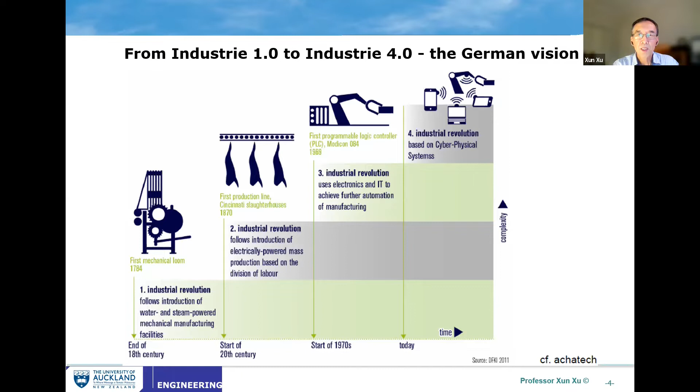So cyber physical system is the key concept in Industry 4.0. But what is it? Cyber physical system, as it implies, has got cyber plus physical, forming one system with physical elements and cyber elements. When you have both, that means the virtual digital world and the real physical world. Once you combine and marry these two different worlds, you become a far more complicated and sophisticated but capable system - that gives you CPS.

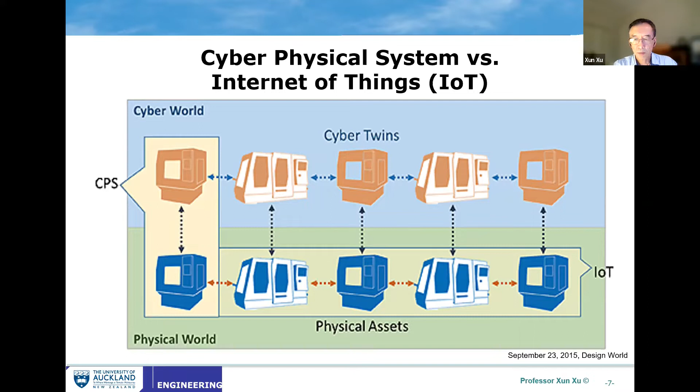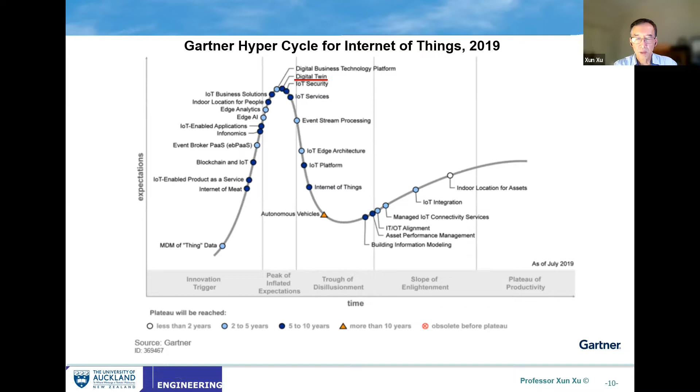And some will actually take less time. So if you see some of the light blue dots, it's telling us it will take about 2 to 5 years to travel through the entire cycle. So it's a useful kind of technology prediction to have a look in terms of knowing more about the technologies, where it is going.

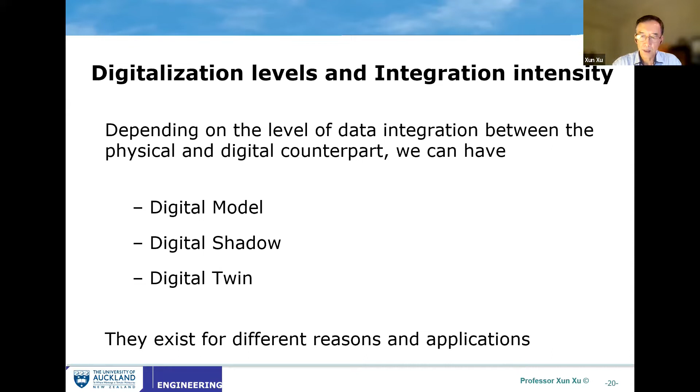So in terms of digital model, that's been around for ages, and those who remember computer-aided design tools and systems like Pro Engineer, CATIA, NX, SolidWorks - well, they're there to create digital models. That's been around for ages.

So they create a digital model for perhaps a piece of machinery, or perhaps for a product you want to make. So that means you have the physical object, and then you create a digital object. In many cases it's just a CAD model, so it has got geometrical information. Sometimes it has got material properties, and other times it has got assembly constraints, tolerance requirements and surface finish requirements. That's all fine, and we've got that.

But there's actually no data flow automatically from the digital object to the physical object. Well, clearly, if you design something and haven't made that physical object, you wouldn't have that link. Now, if you want to create a link, very often you have to do that manually. So that's digital model - we still use it, it's still useful, but it's not quite digital twin because it does not have a kind of data communication between the physical part and the digital part.

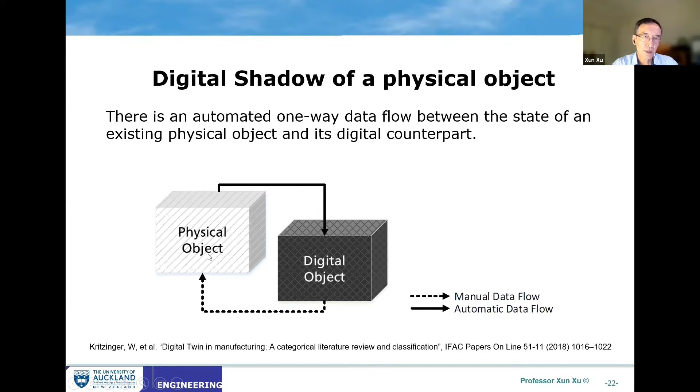So this is actually quite useful technology. I'm going to demonstrate one example that's been developed in our laboratory, maybe two of them. So that's shadow - well, still leaving the communication between digital to the physical part manual.

Then, of course, we have digital twin. This is really looking at data flow in both ways automatically. It's very important to have the data flow from digital to the physical object, so that you can actually make decisions and optimize your physical system or product, because you're making decisions in your digital twin parts. So this is perhaps the ultimate paradigm for digital twin technologies. And clearly it's not easy to do this.

So a logical sequence will be developing a digital model, then a digital shadow, and then the digital twin. That will be a natural sequence. But I should still emphasize that all three types of digitalization methods all have their use and benefits in different applications. So that's the three levels of communication, or different levels of integration intensity, and this digital twin has got the highest integration intensity.

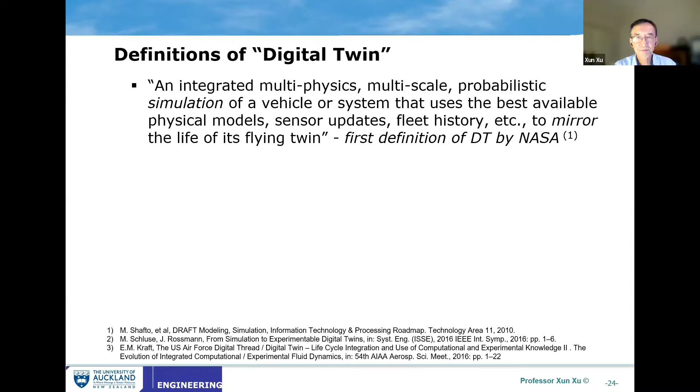The second definition is from an IEEE conference. This really emphasizes the ability between the physical parts and the virtual parts, the communication capabilities. So this is the first time we talk about communication between the two counterparts, the physical and the digital counterparts.

This definition number 3, I think, is perhaps a more complete one. It talks about using multi-physics and multi-scale, probabilistic simulation models, but it also talks about a digital thread. The digital thread is the set of data that you define that will be communicated between the physical and software entity. That's very important.

The other aspect is that the digital twin has got predictive capabilities, so it has decision-making capabilities, and that's why it can predict what's going to happen on the hardware parts. The third aspect is it talks about over the life of its corresponding physical twin, meaning your digital twin is going to be a living object throughout the entire life cycle of whatever that physical entity is. So that means the digital twin will have to get updated from time to time so that it reflects whatever the physical counterpart is or the status it's at.

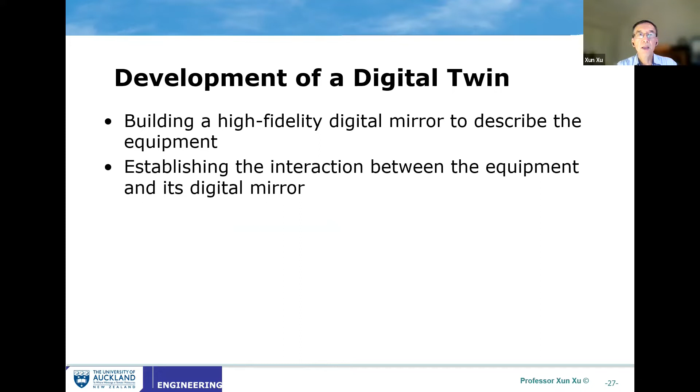Well, it's actually not difficult to understand. First of all, you need to develop a digital mirror to reflect your equipment or products. Then you need to establish the communications between the two. And the third thing is really you need to work on the data, both coming from the physical entity and the virtual space or digital twin, and then make decisions for the entire system. So roughly those are the three phases of developing a digital twin.

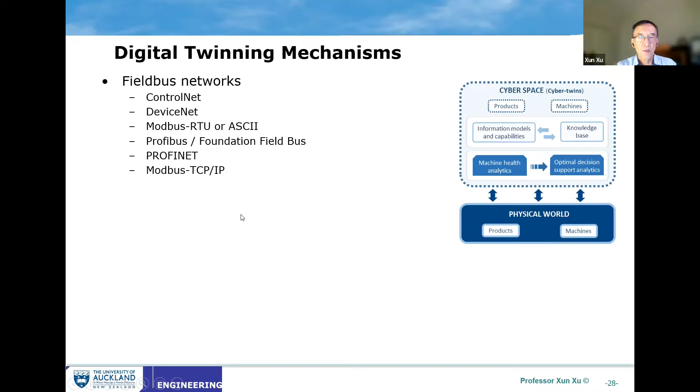We talk about communications and how the physical parts communicate with the virtual parts. There are actually many different mechanisms. The paper we just got an award for talks about some of these twinning mechanisms in detail, but I won't go into the more technical side. Typically you'll rely on some field bus network, Ethernet-based industrial communications, or industrial wireless communications and networks. Typical ones we often see are MQTT, OPC UA, and MTConnect. There are different mechanisms out there, and different applications tend to use different protocols.

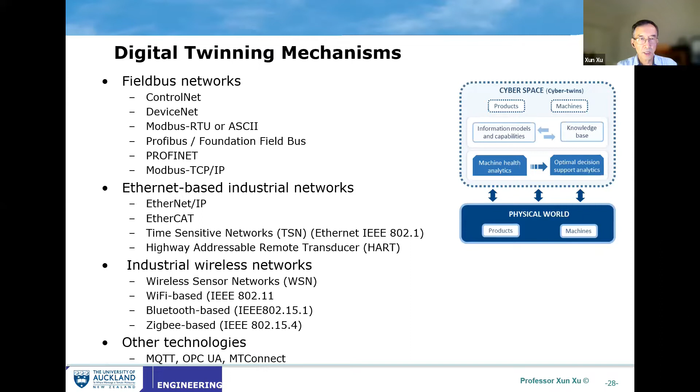So that's digital twin - how do we define that, the applications, and the twinning mechanism. I think the next topic I want to quickly cover is the international standard I mentioned at the beginning. So there is an international standard. But before we look at that, these digital twin standards are mostly ISO standards, covering the spectrum from design all the way to manufacturing and inspection.

It talks about elements of observable manufacturing elements - these are the physical elements, machines or robots - and then the digital elements. To make distinctions between these two, clearly the digital elements are the digital twins. Observable manufacturing elements could be people, equipment, materials, and facilities. Digital entities could be the product itself - there will be a digital representation of the products - and could be the process as well, and the applications that we may see.

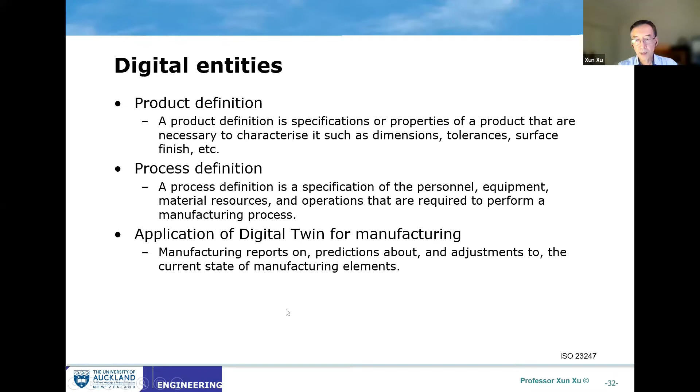Now, as the standards were developed, there was a lot of industry case studies done to support the development of the standards. One of them is the work with Boeing when they produce their wing structures. They often need on-fly technologies, in-situ capabilities of measuring and machining, or what they call robot drill and fill. By developing a digital twin, they can facilitate that process and really cut down the time for the wing structure manufacturer.

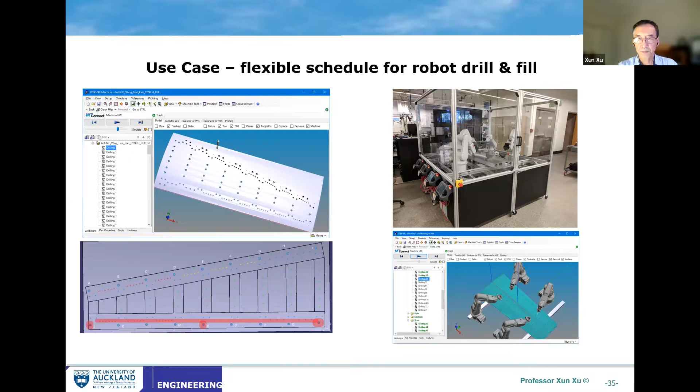Okay, I think I'm coming to the end, but before I finish, I just want to give you some examples that we've done in the laboratory that I'm from. I'll give you a quick look at a bicycle we developed the digital twin for, then we developed a digital twin for machine tools, and also we've managed to retrofit a legacy robot for digital twin technologies.

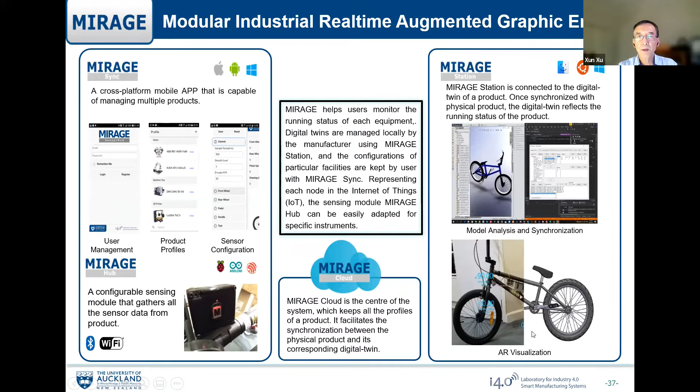Okay, so first up is the bicycle. I won't talk about the entire poster here, but I just want to talk about the way that we developed the digital twin for the bicycle. Basically, we've got a real bicycle and a twin digital model of that, and they actually combine together. So I just want to show the digital model itself.

Sorry, can I ask you whether you can see this? Dr. Samir? Yes, we can, yes.

Okay, good. Now this is a SolidWorks model of a bicycle. You can have a model, but you need to reconfigure that to define different connections and joints - that will be step one. So if you like, we start from a digital model, and then we move on from digital model to a digital shadow. Here is how we define different connections of different parts. I'll speed up a little bit - you can see different parts are being highlighted, and then you define different connections. The reason we want to define different connections is that we're going to have sensors on the real bicycle that will produce data linked to different parts of the bicycle.

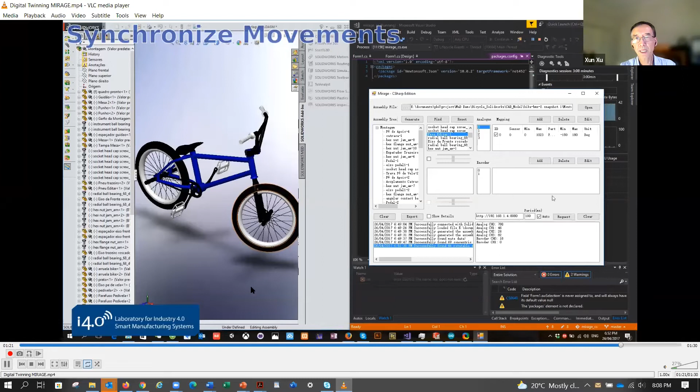Okay, you can see the wheels spinning there. That's because the data is driving the wheel spinning. So in the end, we want to see the bicycle being driven. The digital model is driven by the physical data coming from the physical model. So this is the student's work, he has done the work.

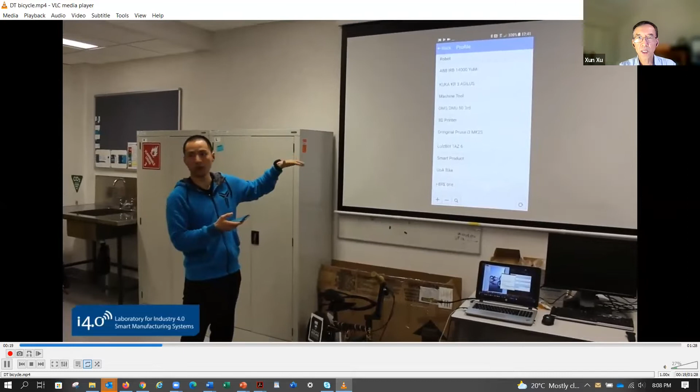You can see the bicycle here. We've got sensors around that. It's communicating with our digital twin using Bluetooth. Now I'll just speed up a little bit.

So you can see the sensors there on the bicycle, and you can actually use your mobile phone to check the data coming from the sensor. You can see the data there. That's from the sensors on the bicycle, and that data actually goes into the digital model. Then it becomes a digital shadow.

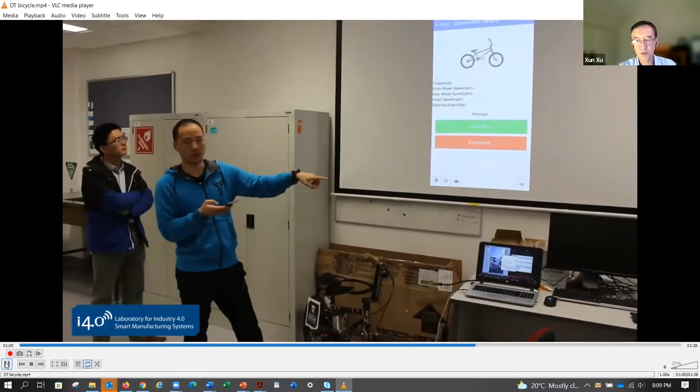Because you have digital data already, you can easily use augmented reality. You can see where he's pointing his phone to the bicycle, and then the data can be overlaid on different parts of the bicycle, in real time demonstrating the data that's coming from the sensors. If somebody's riding the bicycle, you will see the data changing, of course. So that's some advantage we can have with this digital twin model.

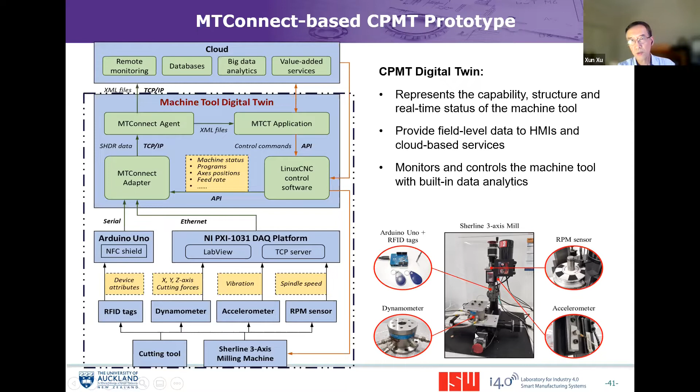Now let's quickly go through the second example, which is the machine tool. The machine tool itself has got a lot of moving parts and different components, so we developed a digital twin for it. We had sensors fitted onto a little desktop machine tool just to do a prototyping exercise, and then we can get the data from the machine tools into the digital twin. You can see the data is about different axes, speed and feed rates, and the position data as well.

And you can overlay the digital data using augmented reality. Once again, to support your production process, you can basically see the things you wouldn't see without the digital data there. You can see the toolpath is being overlaid here.

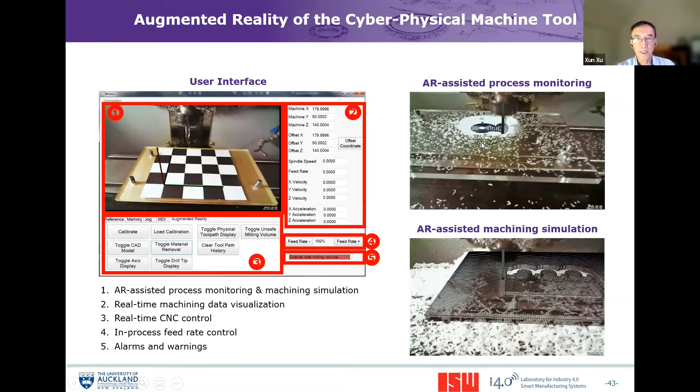The last example is retrofitting a legacy system, which is a KUKA robot. I think this is about 20 or 25 years old. It's a robot that's been around in the lab for ages. But what we've done is we've put in a Wi-Fi enabled chip, which is ESP32, which has got Wi-Fi capability in the controller through serial communication.

Then we use MQTT protocol to communicate through the cloud, so you can actually get the data from the actual robots. I've just got, again, a video here, if I can just show that, which is the final one. See, this is the visualization that we got from the clouds. That robot has communicated to the cloud, provided its moving data there.

You can have multiple clients there, of course, accessing that server. You can see here's another one, and that's the real robot that's moving. And of course, it spits out its motion data as well. So that data is now going through the cloud and driving the digital model. This, if you like, is a digital shadow, a shadow of the real robot. You can see different axis data here changing all the time, on this 6-axis robot.

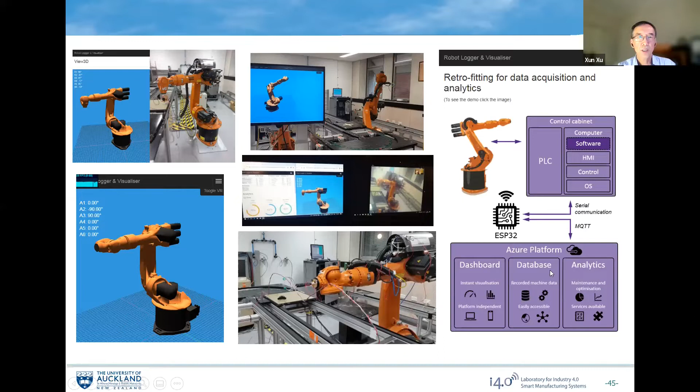So that's an example. We could actually go from the digital model to the physical robot as well. I won't go into details of this, but this is a test that we could also go the other way around.

Right, okay, so let me finish by saying a few final words. First of all, I think one of the key concepts in Industry 4 is the cyber-physical system, and the key in cyber-physical system is digital twin technologies. It's still a hot topic around, if you search around. We acknowledge different views on digital twin, and that's why we talk about digital model, digital shadow, and digital twin.

I touched upon the ISO standard, which is just hot off the press. If you're really keen to do research in this area and want to see what international standards are providing, that's probably where to go. And now we finish off with 3 digital twin examples that we developed in our laboratory.

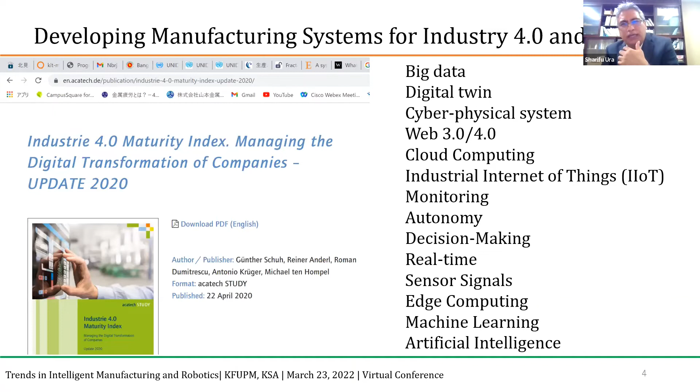Previously all the products were made by craftsmen, and craftsmen can handle many varieties of product with small volume. Then we went for mass production. After mass production, we came to mass customization. And then after mass customization, we came to regionalization, or personalized production.

Regionalization is a very important issue. For example, this year, if you see the US market, Toyota is the number one car seller. Their cars are sold because, during this pandemic, Toyota could manage their production, since 80 to 90% of their parts they are making inside the US. So their supply chain is actually a regionalized supply chain for the North American market.

So regionalized production is actually one of the key issues that will come. And personalized production also, one-of-a-kind product—this kind of thing will be very important from now on.

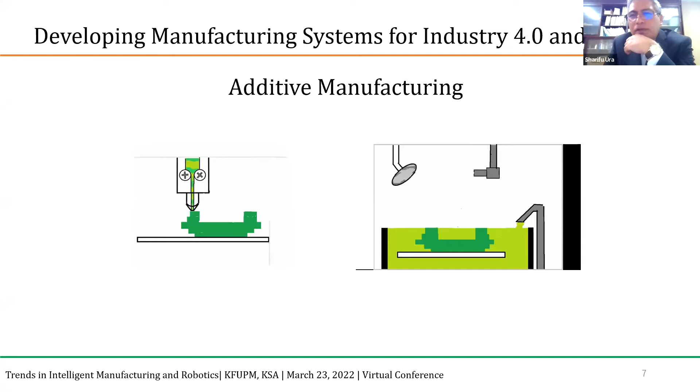The other important aspect is the socialization of manufacturing. Previously, manufacturing would be done by very highly skilled persons and so on. So this is going to change.

You will see all over the world there will be a lot of fabrication labs where you walk in and give an idea of your product. Suddenly it will be digitized and produced. So this kind of socialization will come into being, and 3D printers and this additive manufacturing technology are going to be a very important driver on that.

For example, in our city, besides Starbucks there is a fabrication lab. A lot of 3D printers—high school, middle school kids go there and make whatever they like. So this socialization aspect is very important for this new technology.

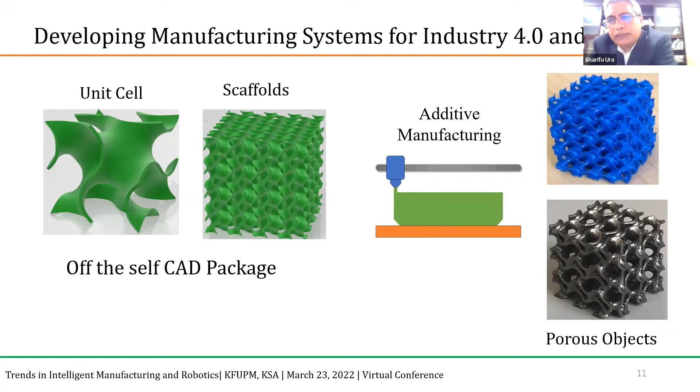So we are trying to build a capacity on that. We have actually created a lot of porous structures for many applications, for veterinary doctors, for soilless cultivation, and for tool shanks with nice vibration control, and so on.

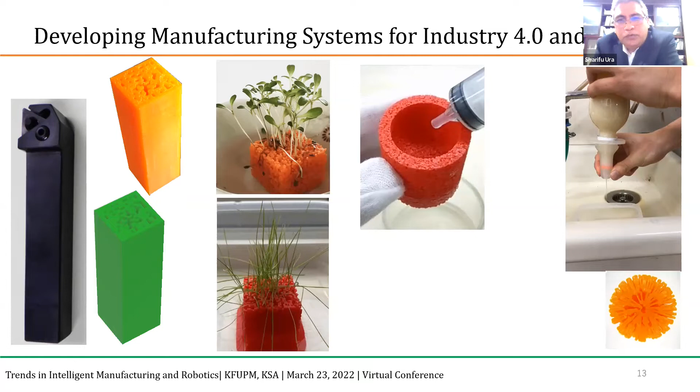This kind of structure is actually very difficult to make using off-the-shelf software. We are developing some systems by which we can do it by ourselves. Say we would like to make a porous structure.

Can you see the video, please? Can you confirm, is the video running? Yes, we can see. Okay.

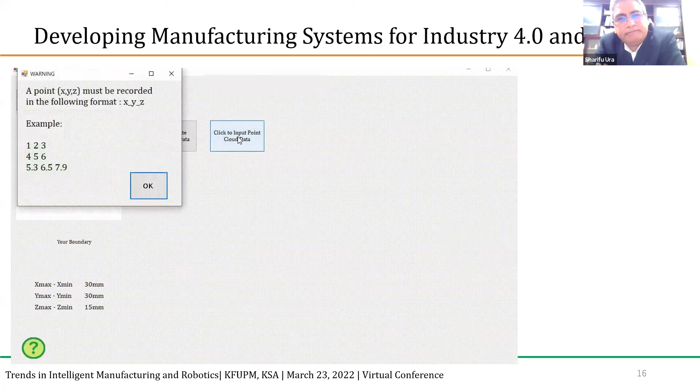This one, we developed another system, actually, for soilless agriculture. We have a non-porous structure. We just create some point cloud, random point cloud around that structure, as you can see, and then we fill the random spaces using a polyhedron and tetrahedron. And finally, we get the structure we want, and we have this STL data by which we can run our 3D printer.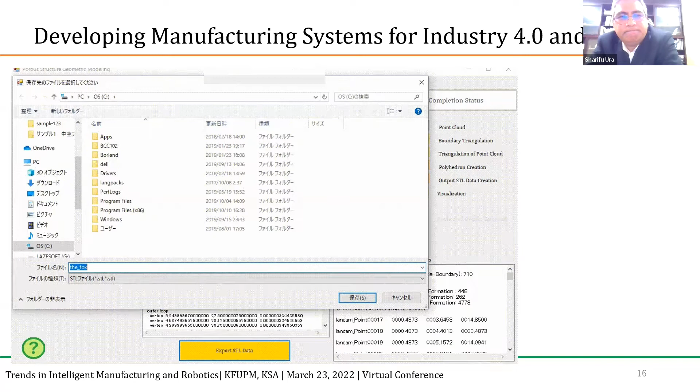Very simple, the user doesn't have to do anything, just 2 or 3 clicks. And this is a software also we developed by ourselves. We can analyze the cross section of a porous structure, whether or not it could be made perfectly or not.

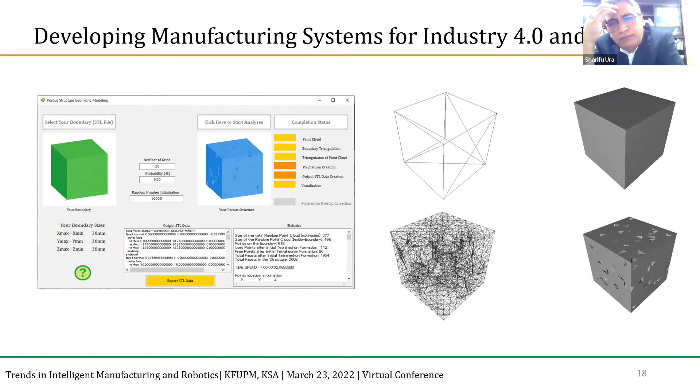So we also tried to develop some system by which we can ensure that, look, whatever my design may be, we could make it properly.

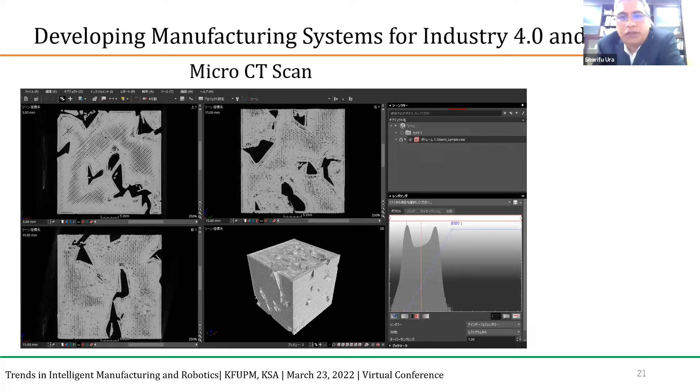So this is a study one of our students is doing now. He is trying to create a porous structure, and then he made the porous structure with different fabrication heights, so that he can take the real cross section of the product. And then we use micro CT scan to see the whole internal structure, whether or not it conforms with our design, and we try to see where the problem is.

So if we see there is a problem, then we go back to the design and try to fix it up. Usually for this kind of structure, we have problems with loose shells or thin walls, or sometimes fabrication errors.

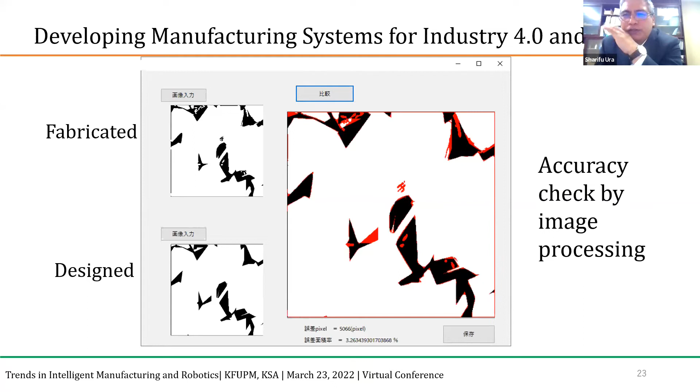As you know, the most advanced software is given by Materialise, a Belgian-based company. They always say, look, your porous structure is not printable, but unfortunately, or fortunately, this is not true. We always try to print it out, and we see that there is almost no problem with the fabrication. So we are trying to develop this kind of software by which we can compare online and give feedback to the designer so that he can stop or modify, and so on.

So now let me talk about Industry 4.0. Actually, 3D printing is also part of Industry 4.0, but let us give it the name Industry 4.0 at this moment.

Industry 3.0, the main point was... This course I have been teaching for our master's students for the last 5 years, and students from many other universities actually take this course online. So the first thing I have to tell them is, what is the difference between 3 and 4?

Industry 3.0 is actually basically automation, and you say that human is not good — human takes money, you have to pay salary, train him, and so on, so let us automate. But in Industry 4.0, actually, we don't say that human is bad. Human is also an important part, and we try to reinforce human by using all that technology, not discarding human from the loop. So that is actually the spirit of Industry 4.0.

And at the end of the day, what happens? We jump from closed system to open system. So there are many aspects of a closed system that we cannot use in an open system. Since the time is limited today, I will not talk about this — we actually cover it deeply in our course called Industry 4.0.

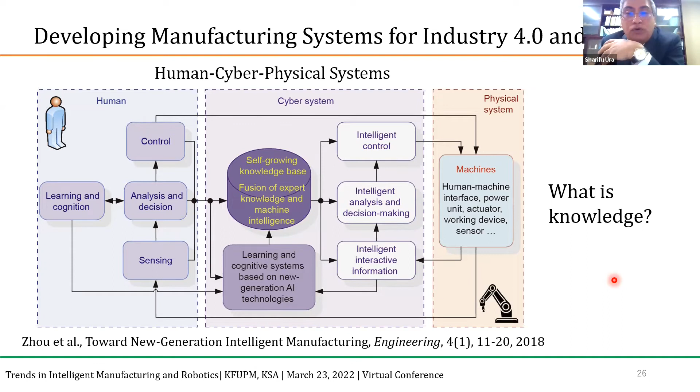So if I go back to the slides, they say that a self-growing knowledge base should be there, with some artificial intelligence for learning and so on. Now we know exactly what knowledge is. Now, when we build a system, we try to figure out everything based on this knowledge-aware network of our information. This is one narrative we always give to our students.

We say, look, for a human cyber physical system, we should have this enabler network connected by the internet, and we should have some sort of data acquisition system, or big data, whatever you call it, and there must be a self-growing knowledge base. And from where do we get this knowledge? Okay, we know the classification, but from where do we get it?

Our idea, in a very narrow sense, for example for machining or manufacturing process, is that there are three kinds of digital twins: object, process, and phenomena twins, that actually provide the knowledge. Therefore, we need to construct the twin and adapt the twin into the system. In that way, we will have this self-growing knowledge base. The more digital twins you can construct and inject, the more knowledge you will find. And there are four forms of knowledge.

What is a digital twin? Professor Xu has given a nice representation of that. I'll just add that if I would like to construct a twin, I have to construct five modules. One is the input module, the other is the output module, by which the twin should communicate dynamically in real time. There must be a modeling module by which we model our object, process, or phenomena. There must be a simulation module by which we actually reverse engineer that phenomena. And there must be a validation mechanism, to know whether or not everything is going fine, whether there is an error, and so on.

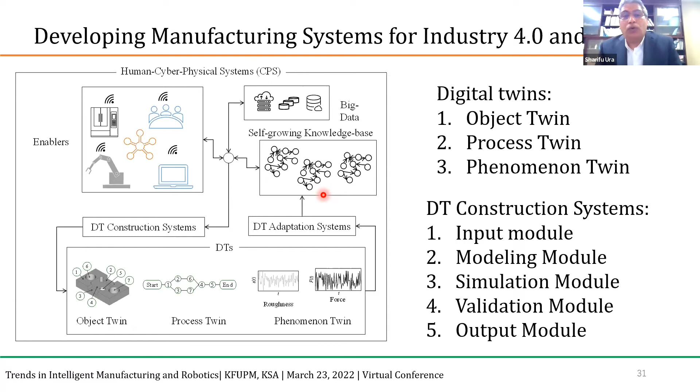When we use the twin, we try to see whether or not it has a real-time response. I think in the last presentation there was a question about how much time I should give. For this kind of phenomena, we see 0.2 or 0.3 milliseconds. If we wait more than that, we cannot handle it. So we actually got a very high response. Please go ahead, see, download, and expand on that. If you have any criticism, any question, or want to work with us, we are most welcome.

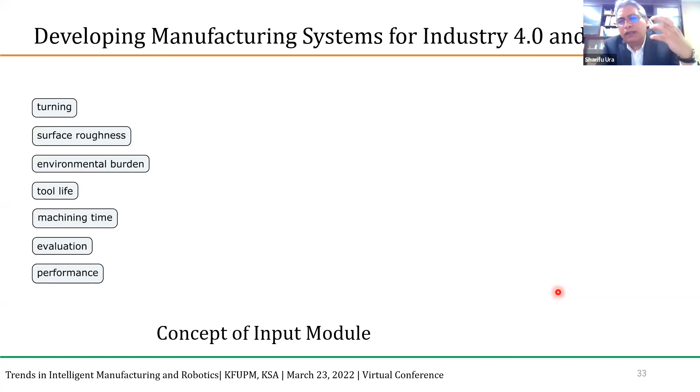I have no time to explain the whole bunch, so I will just talk about the input module, which is a very important issue for digital twin. We were trying to use almost a natural language type of expression to build this input module, because Professor Xu has shown that there are many ISO standards available. We would like to break those standards — we think that in Industry 4.0, each person will have his own way of talking or standards. So we don't mind whether he follows the ISO standard or has his own way of expression. We are trying to see how we can build this input module and organize all this information based on natural language.

For example, a very simple idea: turning, surface roughness, environmental burden, tool life, machining time, evaluation, performance — these are some concepts that came into my mind. If I organize them, it will create a sentence: performance of turning can be evaluated by machining time, surface roughness, tool life, and environmental burden. This way, at the shop floor level, people talk to each other and express their views. If we can put all this information into sentential expressions, it's very easy for humans to understand, and also for machines — we can easily make XML data out of that, which is machine readable. So we are trying to do what Professor Xu is saying, that we have to follow the standard. We are actually saying no, we will break it. This is a wild proposition, and I think industry, at least beyond Industry 5, will go to this level.

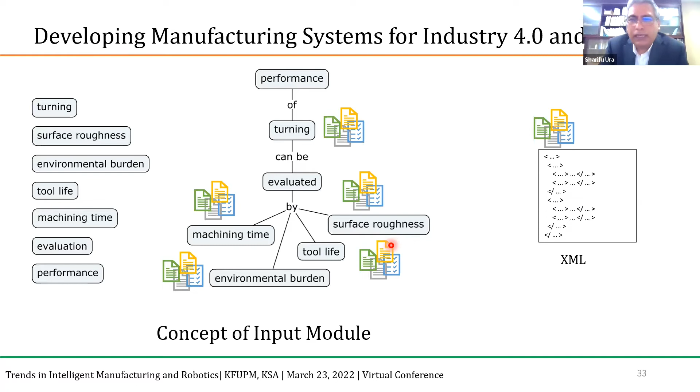So for the input module, we will have this XML data, and it should come from our big data. Where do we get the big data? Frankly speaking, there is no big data for manufacturing. The only big data we have now is material big data, developed by Professor Ashby at Cambridge University. Unfortunately, he sold his data to ANSYS, so now you cannot buy it from his company, Granta Design. For manufacturing processes, we don't have it — we need to build it up. So we are actually working on that: how can we organize unstructured or semi-structured documentation so we can build the big data, and the big data provides the XML data that can be fed into our digital twin's input module. This is work we've been doing for the last three years, and we are hopeful we will progress a lot. It would be nice if you can join us in that research.

So in the future, what is going to happen is that we will have some sort of iPad where we can see the digital twins, and we have our own needs - maintenance need, or decision-making need, or visualization need, or automation need, or our process planning or enterprise need. So for these needs, actually, we will get the knowledge from the digital twins.

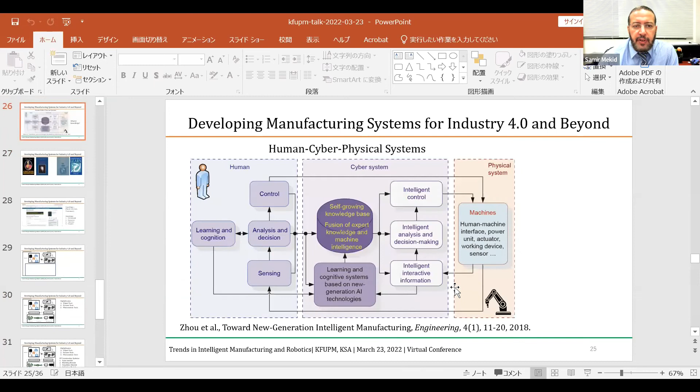Thank you very much, Professor Sharifu, for this nice and informative presentation. I've got one question for you related to Industry 4.0, related to 3D printing. Did you try to have access to the STL file and go ahead with modifications automatically, or here, yes, in this process here? Or what was the exact process you went through?

Yeah, for STL data, for example, this one - as you can see, we have only 12 facets. It's very coarse. So in our system, we actually divide these facets into very small facets. We have this capacity here, so we can manipulate whatever STL data we input into our system. We can manipulate based on the porosity level that we want, or the coarseness of the pores that we want.

Okay, so you are securing a closed loop efficient correction. Well, I should not say efficient correction. What I see is that it's very interesting - all the pores, they support each other. As you know, if you have a vacuum, you cannot add material. But the pores are so close to each other and distributed randomly that they actually support. Without support, we would weaken. So what I would say is that we are lucky in that sense - without doing anything, we could actually produce that one.

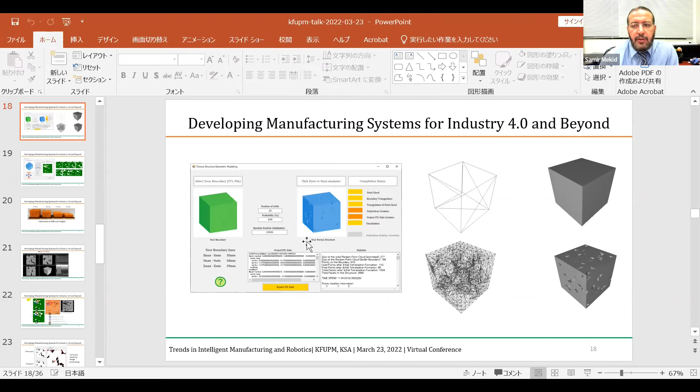In your slide number 35, when you were talking about a possibility - yes, here to have - there are various applications I'm aware of. For example, DMG or Index companies have already partial Industry 4.0 monitoring of processes and production lines. I don't know whether you have seen that, and what is missing in this loop?

Well, DMG Mori Seiki, you are talking about. Yes, these yes, German Japanese companies. Yeah, you know, Mr. Mori, I met him at Professor Teti's conference many years back. And we are talking, and what he's saying is that due to this Industry 4.0, all things are connected.

So his engineer is actually receiving a lot of information, and he has only 28 engineers to take care of all those machines in Europe. At the end of the day, human beings have to check. This is the problem that they are facing, and they are actually burdened with unnecessary information. So the thing that I told you is that now we are pretty much on...

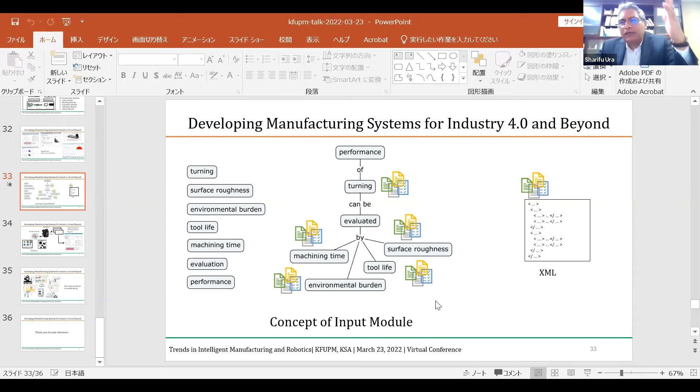For example, here we are saying that data will be used for building a digital twin. So if you think that data will be used for a digital twin, then think about the components of the digital twin and prepare information based on feeding those components. Otherwise your data will just grow up, and at the end of the day you cannot use it—it will not add any value to your production.

We've got another question asking what is new in Industry 5.0 as compared to 4.0. This is a question my students also ask me. You know, Industry 3.0 was only for M2M, machine-to-machine communication—we call it syntax. The grammatical rule is very, very important, that's why a lot of standards are there.

But for Industry 4.0, semantics and human involvement are very important—meaning is very important, what does it mean. And for Industry 5.0, or beyond 4.0, the most important thing will be pragmatics.

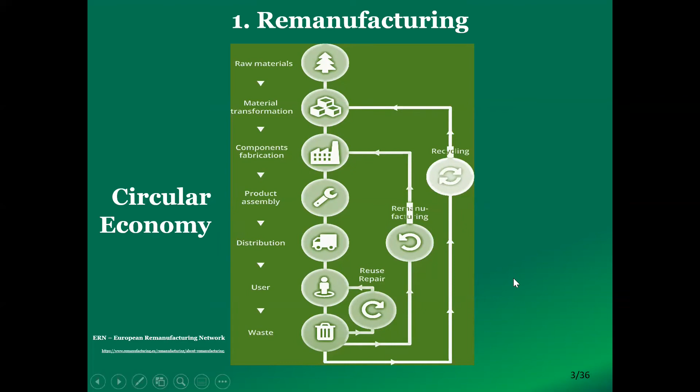As I said, it's part of the circular economy, and because of that, we are interested in what it does for us. But before I cover what it does for us, I just go through the different operations involved in remanufacturing.

Now, why can you have something better than the original product? Maybe at this stage, you could replace an old component with a new version of the component - let's say a component with a new material which is stronger, lighter, and therefore the final product can be even better than the original product. So at least the quality is the same or even better.

Disassembly is the first operation in remanufacturing. Without it, there won't be any remanufacturing possible. You have to take the product apart before you can do all these operations to it.

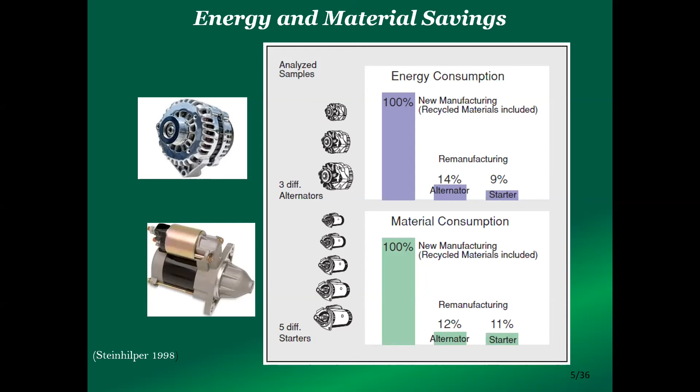So those are the incentives: environmental, resource, and other things you can save. And of course, all this translates into lower cost for the manufacturer and lower cost for the consumer. In many cases, a remanufactured product can be 30% cheaper than a brand new original product.

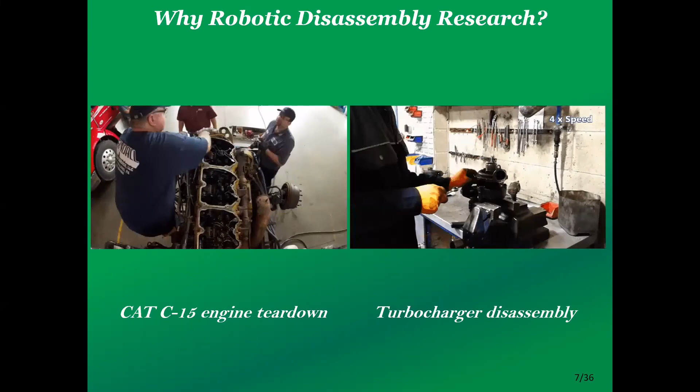The left-hand video shows disassembly, a real operation here at an engine remanufacturing company. Remanufacturing is very labor intensive, you can see lots of people involved. On the right-hand side, also remanufacturing, disassembly in particular is a very skill intensive operation. It's very hard to automate. So I show two things: it's labor intensive and skill intensive, and it's very hard to automate.

People try to use robots, but it is not easy, because it is a labor intensive and a skill intensive operation. So robotic disassembly is something people try to do to solve this bottleneck in remanufacturing.

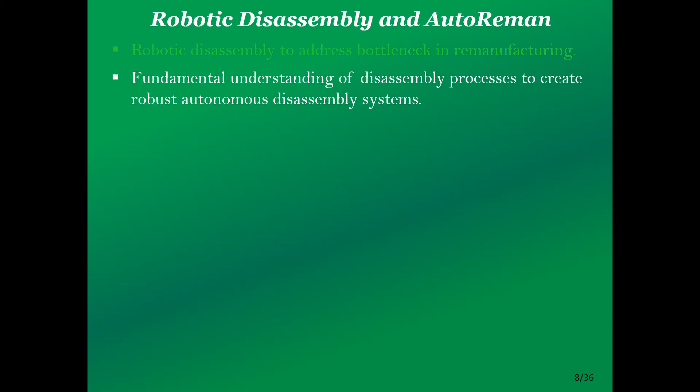Our research tries to derive some fundamental understanding of disassembly processes. Remember, disassembly is the first operation in remanufacturing, so we focus on it and try to get a fundamental understanding of it. We are not the first group to study robotic disassembly - it has been studied for 20 years - but we are the first to look into disassembly as a fundamental operation and to apply science to the study of disassembly.

Here is a kind of symbol of our project, which you'll see as a background in my photos later. The project consists of 5 different modules. The first is disassembly science. It has taken us about 3 years to study this, but it can actually take people 20 years to study disassembly science, so there's a lot of work to do.

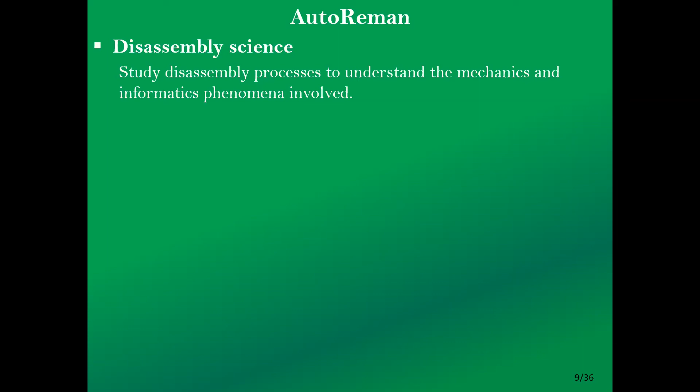From studying this disassembly science, we hope to come up with strategies to enable robots to perform disassembly in a reliable manner. So that's disassembly strategies derived from the science, from the understanding.

We want robots to conduct disassembly automatically by themselves if possible. Sometimes they get into difficulties because disassembly of a used product is a difficult process - the condition of the product is not known. So the robot can encounter many difficulties and problems during the disassembly process, and it may have to replan, since the plan designed for it at the beginning may not be executable. So planning and replanning of the disassembly operation is something we have also been studying.

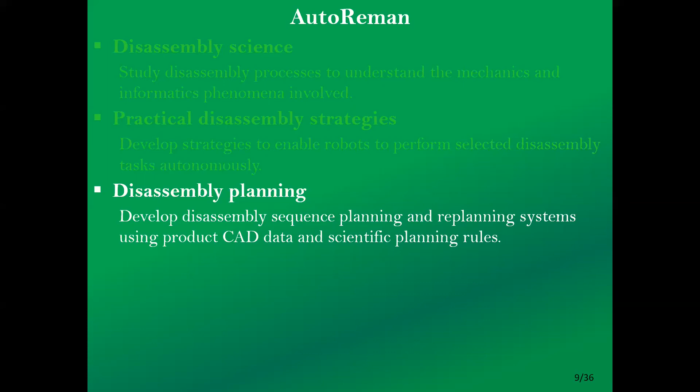Now we realize that total automation of disassembly is not possible, at least not economically, because there will be cases where it is too expensive to perform total automation. So we look at human-robot collaboration to address problems where it is not economical to use robots for disassembly, or when there are technical problems too difficult for robots to solve. So we study human-robot collaboration in disassembly as well.

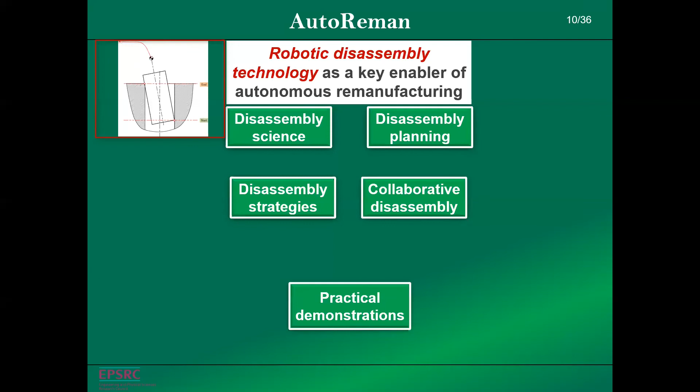And the final work stream is to construct practical demonstrations of all the strategies and techniques we have designed. So here's the project summarized again - it has these 5 modules. Disassembly science: we look at fundamental operations, basic operations, and study the forces involved in disassembling, and the information we can get out of a disassembly operation that we can use to get a robot to perform disassembly automatically and reliably. So strategies are devised to enable robots to perform these basic operations, like pulling a pin out of a hole.

And disassembly planning, we look at the ways that a product can be disassembled. And we look at human-robot collaboration, robot-robot collaboration in disassembly. And then we construct a number of case studies.

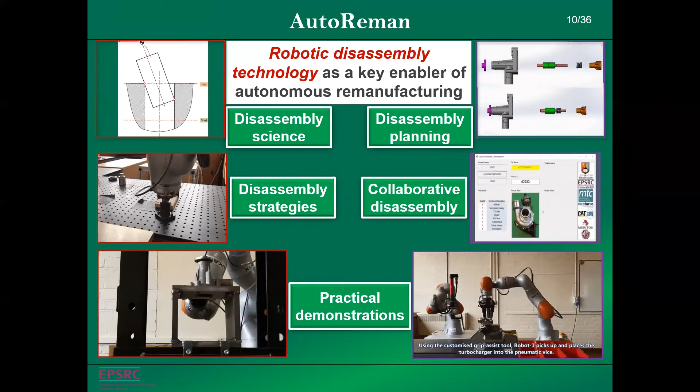Before we started the project, we conducted a study of more than 400 different products to see what the most common disassembly operations were, so we could focus on them. In total, we found about 12,000 operations, and we classified them. Unscrewing was the largest class, about 40%. Separation was another class, and pulling—like pulling a peg out of a hole, or pulling a shaft out of a bearing—was another class of operations.

So we studied how to do unscrewing, and in particular, how to do it automatically. We look at vibrations as a way of getting things to self-loosen. This self-loosening has been studied for many years, but in the context of preventing self-loosening. We study it in order to promote self-loosening in disassembly, and we're designing tools to enable this to happen more easily. So this work is ongoing.

We also studied the effect of heating on disassembly. We aged screws artificially, putting them in salt and saline solutions, and overnight they could become very rusty. We studied the efforts involved in unscrewing a rusted bolt, looking at the use of forces, lubricants, and also heat. We found that lubricants can help, but heat can help even more. This work is also ongoing.

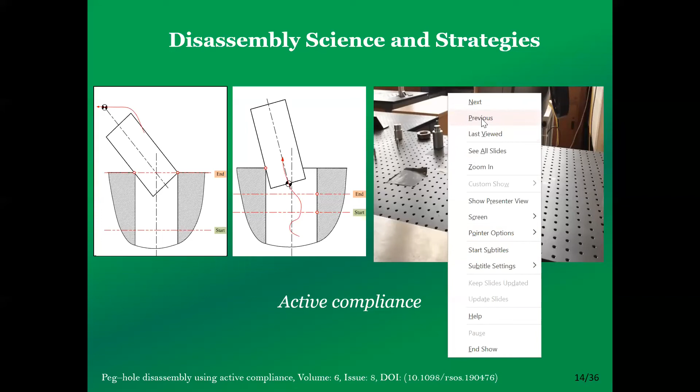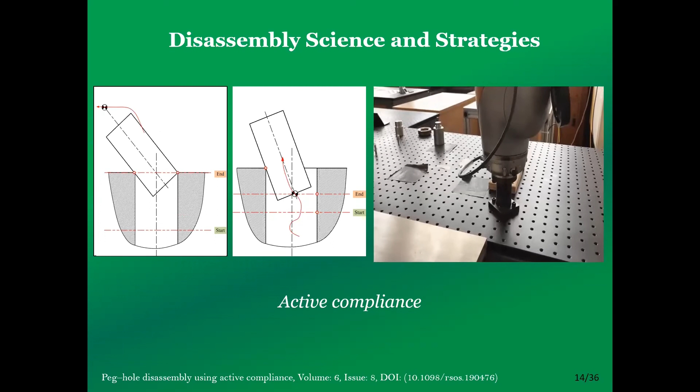So from our study of fundamental operations, we were able to devise strategies to remove the pin from a hole without getting stuck. Why do we want to prevent the pin from getting stuck? Well, if it gets stuck, it can be damaged, or the hole can be damaged. If we want to save these components for further remanufacturing, we want to avoid this kind of damage. That's why we use force-torque sensing and this compliance strategy, to enable the robot to remove the pin without damaging either.

In addition to active compliance, we also looked at passive compliance. Those of you in robotics and interested in assembly will have heard of the use of passive compliance devices for inserting a pin into a hole. Now we look at passive compliance devices to help us remove a pin from a hole without stressing either of them. We did a stress analysis of the movement of the pin from the hole, with and without the compliance device. Without the compliance device, the pin gets very stressed, but with the compliance device, the stresses are much lower.

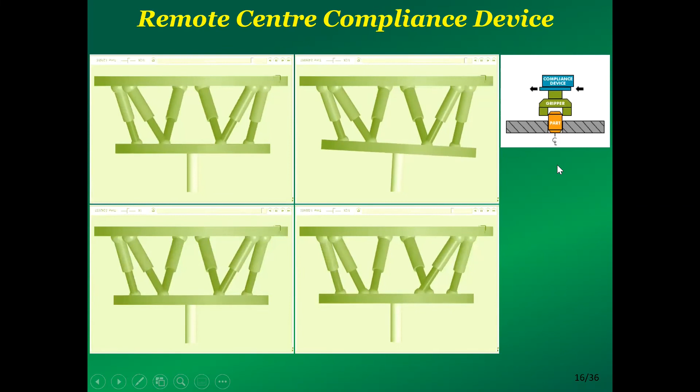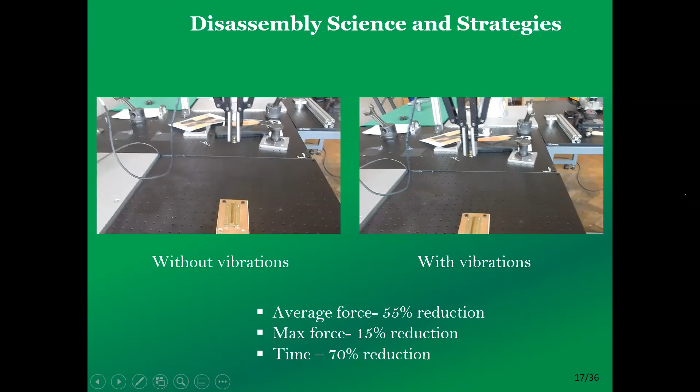We don't just teach the robot to perform operations. We let robots learn by themselves. In this case, we let the robot learn the operation using reinforcement learning. In reinforcement learning, there is a reward function, R, big R, and the aim is to make R as large as possible by taking decisions autonomously. So the robot performs trials and errors, and through trial and error, it can discover the way to remove a component in a way to maximize the reward.

This big reward consists of smaller rewards, little r, and a small reward r is made up of these components, and this is the movement. So if the movement can be made large, and the forces and torques felt by the components and the robot are minimized, then r will be large. If you can make a lot of large r's, then this big R will be large. So this is how we make a robot learn its operation through reinforcement learning.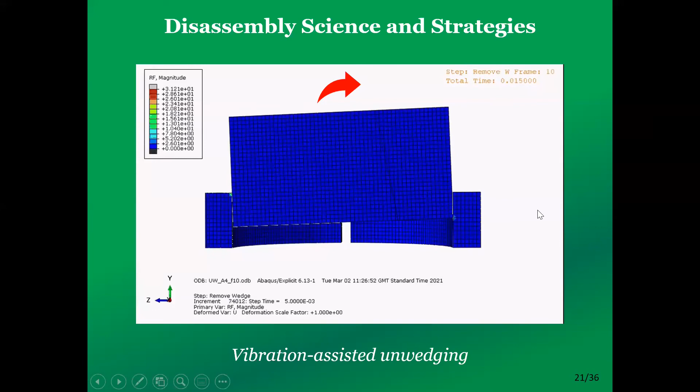So this is a very simple case. In the more difficult case, an optimization program will be needed. In our case, we have our own optimization algorithm known as the Bees algorithm. When you have hundreds of components, the Bees algorithm will be needed in order to come up with an optimal disassembly plan.

I mentioned collaborative disassembly, and the reasons for that. There may be difficulties, for instance a force that is too high for a robot to apply, so a person may be needed, or the force is too high for a person, and a robot and a machine may be needed. There may also be economic benefits - if the batches are very small, you can't devise tools and fixtures to enable a robot to perform a disassembly operation, so a human may be the most economical means. And sometimes there's social motivation - you want to replace a human with a robot as much as possible when the task is dangerous or boring.

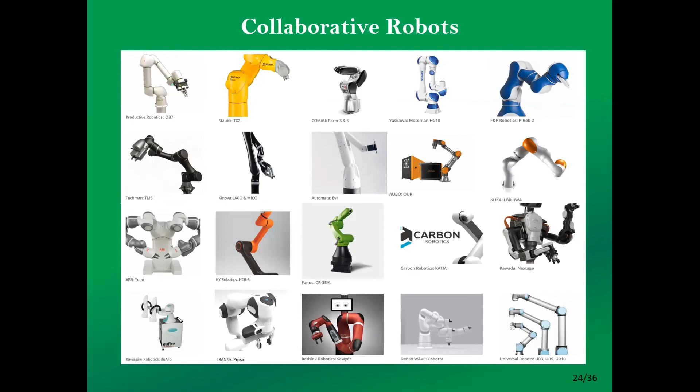In our lab, we use a number of collaborative robots. These are not all the robots that we have, we have only a small number of collaborative robots, and I will show you some demonstrations of robots performing disassembly.

The first demonstration, which I won't show here but you can see on YouTube, is the disassembly of a water pump. Here is a cell where we have a robot and a machine, and the person operates the machine. This is only a lab demonstration.

We have a manual press, used to remove a press fit component. A high force is required, so the press is needed, and the person operates the press because it's manual. Normally, if only a person is used, then the person catches the part as it comes out of the press in order to prevent it from dropping and getting damaged.

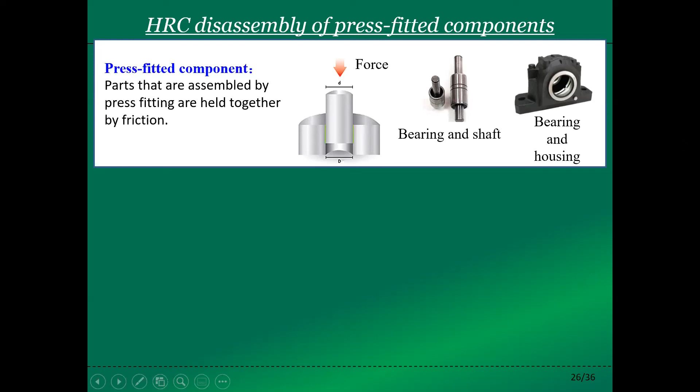But because we have a robot, the robot can act as a third hand of the person, and the robot goes and catches the component, as we can see here. So instead of the hand of the person, here you will have a robot catching the part as it comes out of the press and moving it to its final location without dropping it.

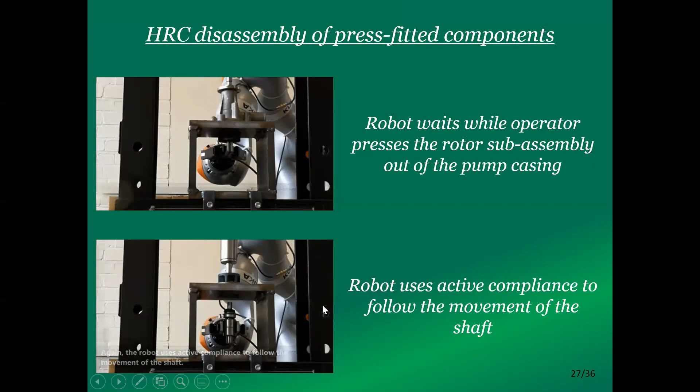So you can see here just clips of the demonstration. It was supposed to work, but yeah, there we are. You can see that the hand is waiting and the person is doing the pressing, and the robot catches the component here as it comes out and then puts it away without dropping it, so it doesn't get damaged. So that's one demonstration.

Here's another demonstration, which I will hope to show you because I think we still have a bit of time. Here's the demonstration where we show you two robots working with a person. Most of the time, the robots work on their own, and then when the robots have difficulties or when there are difficult jobs, then the person comes in to do the work. So here we are.

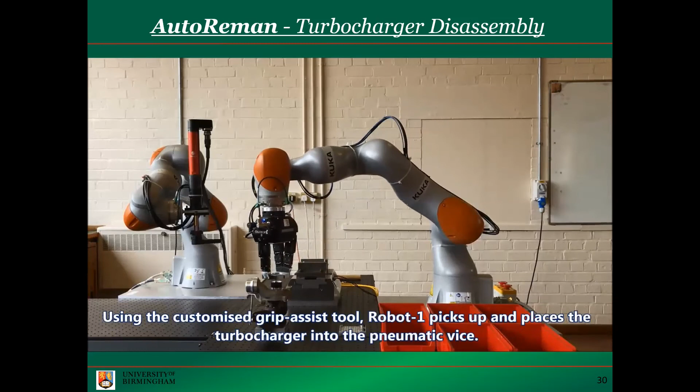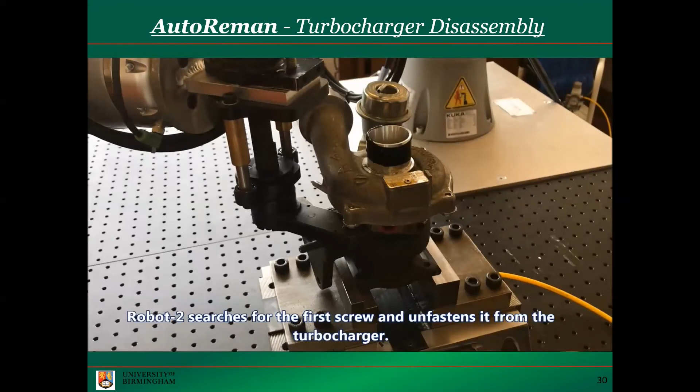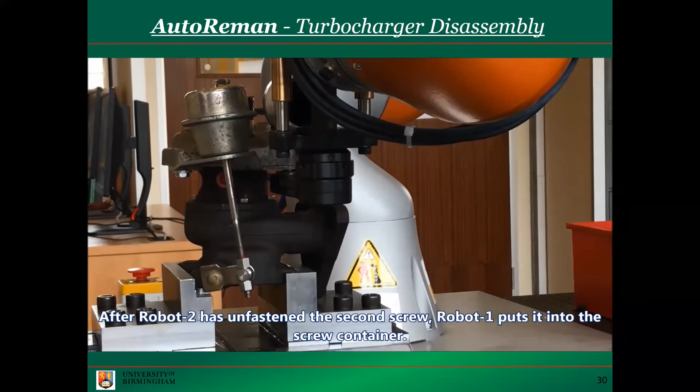So this is an unscrewing tool. Now, because the location of the turbocharger is not fixed, there will be a need for the robot to search for the screw. We will show you the searching operation in a few minutes. There we are, you can see it's searching for the screw. Then it finds it.

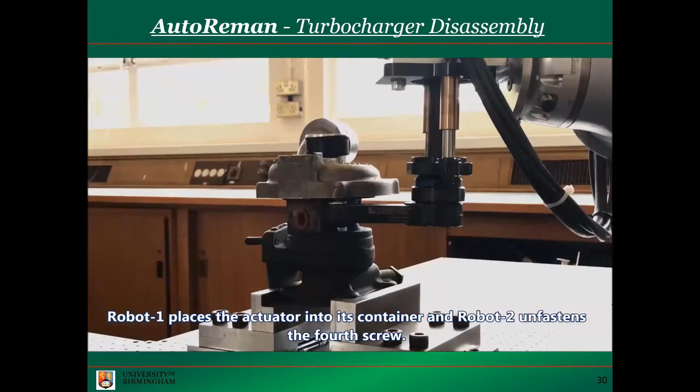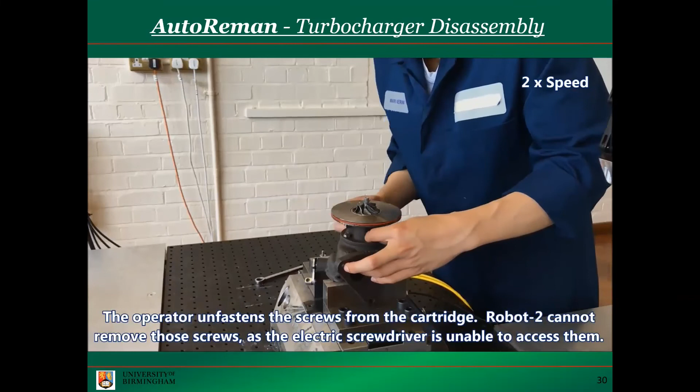And the person comes in to help, where access is not easy for the robot. Now, this operation is difficult for the robot to perform. This operation is also difficult because of access. And because the robots are collaborative robots, they don't need to be fenced. You can work next to the person, as you can see.

So that was our second case study. The third case study is entirely without humans. Here is an automated cell that we are constructing - we have actually completed the cell. We have 4 robots here rather than 2, and the idea is to use the robots to disassemble a car battery. Now, this is an operation that can be also very dangerous. That's why people are not involved.

I'm not showing you the full operation, it takes a long time, so I'll show you only bits of it. We also are constructing a digital twin of it - here is something that we are constructing. It's not yet finished, the twin is not yet finished, but the cell is finished.

And here is something interesting - you can see the operation, which is to remove this cable. The robot uses its hand to prise the cable, and then it uses a vision system to look for the cable, and it will grab it. Yes, it's found it, grabs it, and then it pulls it.

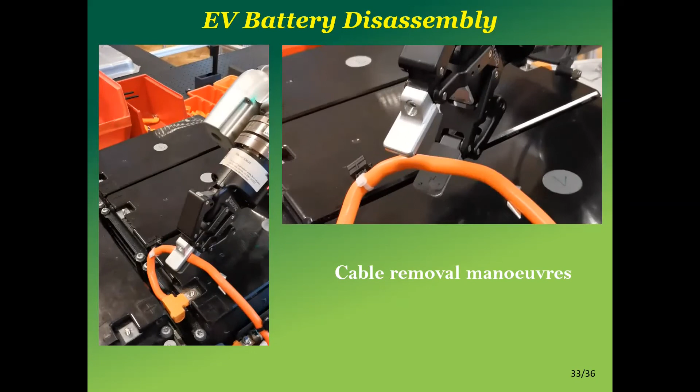Then there is one last operation at the end there in order to remove the cable completely. The robot has to look for the cable. It has found it now. Then it goes and tries to wriggle it. You can see the wriggling operation as well. This is something that we are also studying.

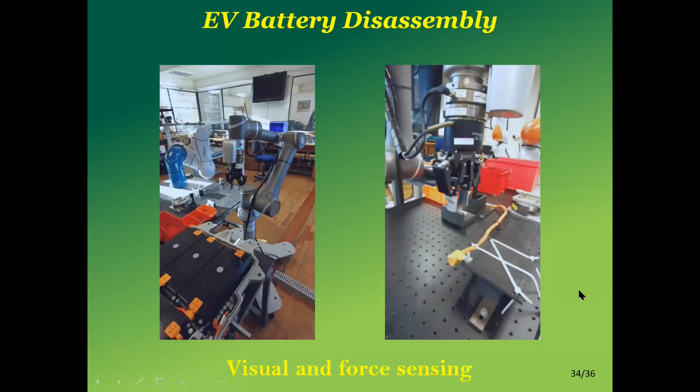Although there is another quick video, I think in the interest of time, I will skip that one, if you don't mind, and conclude.

So we can see that the first step in remanufacturing is disassembly, and currently disassembly is very labor intensive. Our project focuses on developing an understanding of disassembly to help robotize disassembly, thus clearing a bottleneck in remanufacturing and enabling smarter remanufacturing.

We established this project 5 years ago. We have established a community in this area of robotic disassembly and remanufacturing. You're very, very welcome to join us. There's a lot of work to do. I would say that for a young researcher, they can spend 20 years on this problem of disassembly, and there will still be work to be done. I can tell you that my PhD was on peg hole assembly, and 40 years later, people are still working on peg hole assembly, not disassembly. So I am sure that in 20 years' time, at least, there will still be people working on disassembly. So you're very, very welcome to join our team to work on this problem and other problems to do with remanufacturing.

There is an online event organized by our colleague Jun Huang at Wuhan University of Technology in China, and you are very, very welcome to attend. It's a free event. Thank you very much.